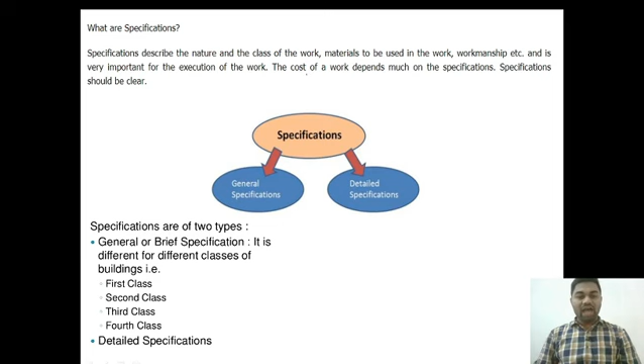General specifications also depend upon different classes of work, different classes of building. For first class of building, the specifications will be different. For second class of building, the specification is different. For third class of building, the specification is different. For fourth class of building, the specification is different. And we have detailed specification also.

So what is the purpose of giving the specification? Why, before starting a work, does the specification have to be worked out? The cost of a unit quantity of work is governed by its specification - how much quantity, if I do the work of 1 square feet or 10 square feet. Suppose I am constructing a wall, what type of brick I have to use, what is the dimension of the brick, what should be the mortar laid between the bricks - so the cost of a unit quantity of the work is governed by its specification. Based on that specification, the cost per unit can also be derived.

The second purpose: specification of the work is required to describe the quality and quantity of different materials required for a construction work, and is one of the essential contract documents. Why is it so? Because in the specification, the quality and quantity of the different materials required for the construction work are worked out. Third, this also specifies the workmanship and the method of doing the work.

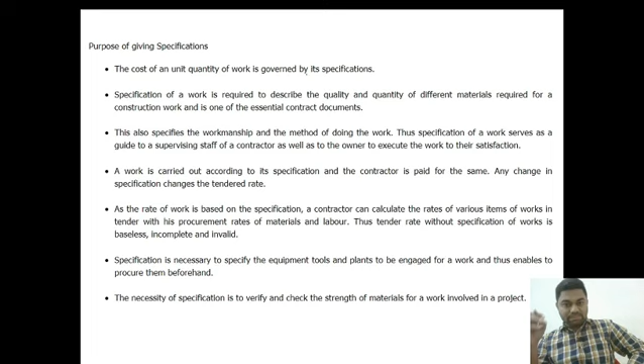Any change in specification changes the tender rate. Whatever changes occur in the specifications, there is a change in the tender rate also. As the rate of work is based on the specification, a contractor can calculate the rate of various items of work in the tender using his procurement rates of materials and labor. The tender rate without specification of work is baseless, incomplete and invalid.

Suppose I am the owner, I will be taking the detailed specification of my work from an engineer. If those details are not there in the specification, the contractor cannot bid for your project, because he doesn't know what type of material you need.

Suppose I want to construct a building, and I have not specified whether there should be marble, whether there should be a false ceiling, whether there should be putty on the walls. So how will the contractor know whether all these things have to be laid or not? How will he give the total estimate of your building?

So for accurate estimate, for accurate tender, what we need to do is work on the specification in a very detailed manner. By which, if our specifications are not clear, the tender rate without specification of the work is baseless, incomplete and invalid.

Next, specification is necessary to specify the equipment, tools and plants to be engaged for a work, and thus enables procurement beforehand. Suppose we are laying the slab - in the specification it should be clearly mentioned whether RMC has to be used or it has to be laid with the help of a mixer. If you specify this RMC or mixer point in the specification, it is easy for a contractor to procure that equipment. He will be ordering those equipments in advance, so as to procure beforehand.

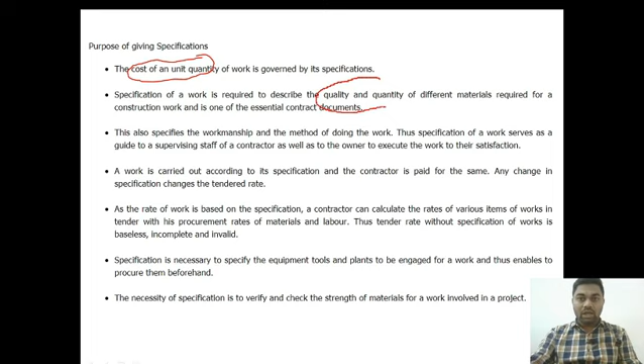Specification also describes the quality and quantity of different materials required. It also helps the supervising staff, the contractor, or the owner to execute the work to their satisfaction. It may help - let me locate the pointer.

It helps the supervising staff, contractor, as well as owner to execute the work according to their satisfaction. Work carried according to the specification, the contractor bills will be paid according to the specification on which he is working. So that is also included.

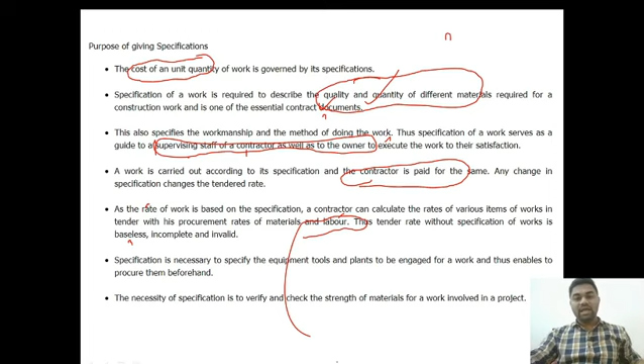Contractor payment will depend upon the specification. Based on specification, procurement of various items and rates of the materials will be done, so it will be helpful for tendering. Specification is also necessary to procure equipment, tools and plants in advance, and to check what type of materials are involved in the project.

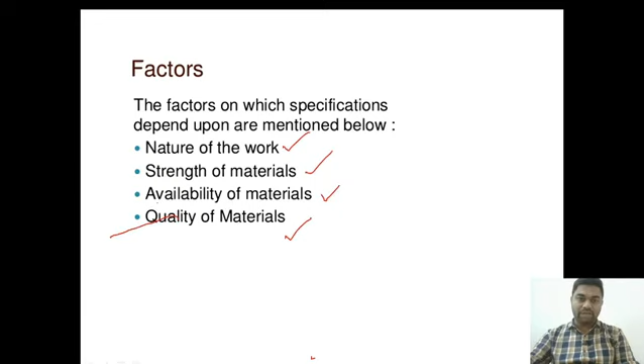The factors on which specifications depend are: first, nature of the work; next, strength of material; next, availability of material and quality of the materials. Our specifications mostly depend upon these factors. These things are mainly considered and checked to decide the nature of the work, the strength of the material, and the availability and quality of the materials. These are the factors on which specifications depend.

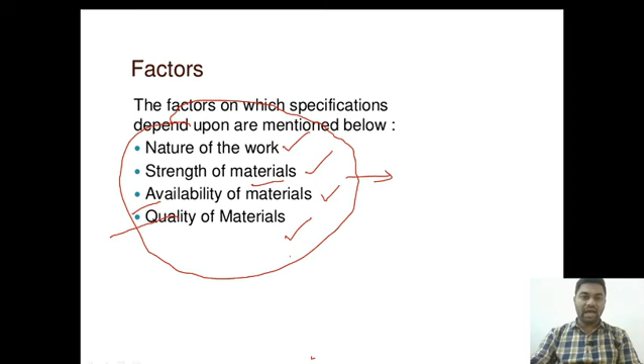As we know, specifications are of two types: general specifications and detailed specifications. First, let us see what general specification is about. Here we are looking into the general specification of first class building - what all things have to be included in it. In first class building, foundation and plinth will be laid.

DPC is known as damp proof course. DPC is of ratio 1:1.5:3 cement concrete, of 1 inch thickness, with standard waterproofing material mixed with cement and 2 coatings of bitumen, and flooring has to be done. This is generally the general specification of first class building.

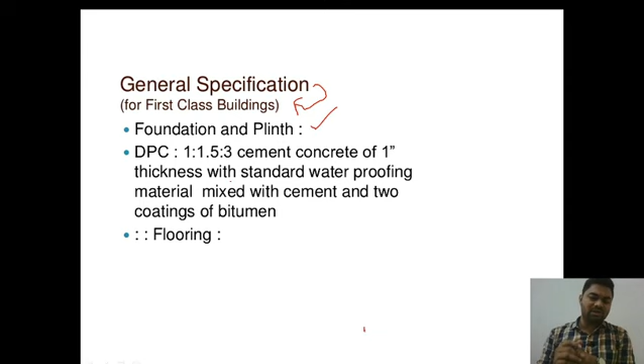What do we mean by first class building? In first class building, foundation and plinth should be there, DPC should be there. What should DPC contain? 1:1.5:3 cement concrete of 1 inch thickness, with standard waterproofing material mixed with cement and 2 coatings of bitumen. Flooring also has to be done in first class building.

Now let's look at the general specification of foundation and plinth, how it varies in first class buildings, second class building, third class building, and finally fourth class building.

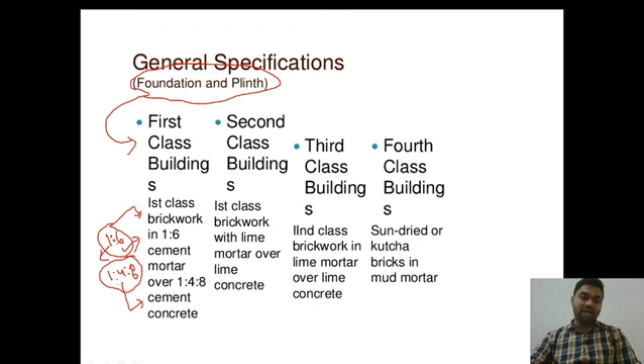In the first class building, the brickwork has to be done in 1:6 cement mortar and 1:4:8 cement concrete. The mortar used in first class building should be of ratio 1:6, and the concrete should be of ratio 1:4:8. Here 1 represents cement quantity, 6 represents sand quantity. In the concrete, 1 is cement, 4 is fine aggregate, 8 is coarse aggregate.

In the second class building, the specification is: first class brickwork with lime mortar over lime concrete. Instead of cement, we need to use lime in second class building. In the third class building: second class brickwork in lime mortar over lime concrete. Whereas in fourth class building: sun-dried or kutcha bricks in mud mortar.

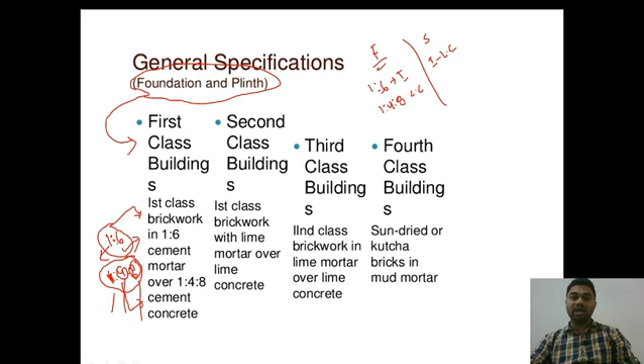So these are the general specifications for foundation and plinth in different classes of buildings. Once again: in first class building we use 1:6 cement mortar and 1:4:8 cement concrete. In second class, lime concrete is preferred - first class brickwork in lime concrete, not cement concrete. In third class building, second class brickwork is done with lime concrete, whereas in fourth class, sun-dried kutcha bricks are used with mud mortar - here neither lime nor cement is used.

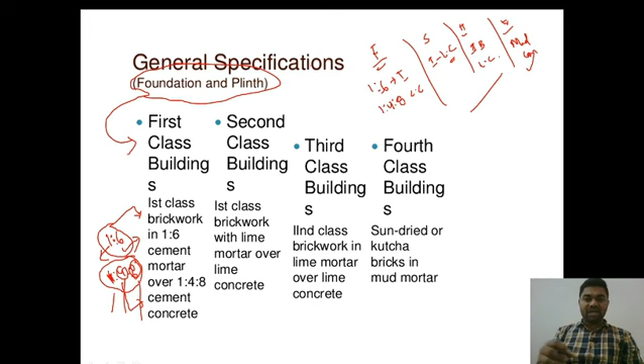So these are the things about general specification for foundation and plinth. Now let's talk about the general specification of damp proof course. In the first class building, we have to use 1:1.5:3 cement concrete of 1 inch thickness. In the first class building, what should be the cement concrete used?

The ratio 1:1.5:3 means 1 part cement, 1.5 parts fine aggregate, and 3 parts coarse aggregate. Cement concrete of 1 inch thickness with standard waterproofing material mixed with cement and bituminous material has to be used for waterproofing.

In the second class building, we use 1:2 mortar of 2 centimeter thickness with standard waterproofing material. In second class buildings, we are not using concrete, just mortar, whereas in first class buildings, for the damp proof course, we use cement concrete of ratio 1:1.5:3.

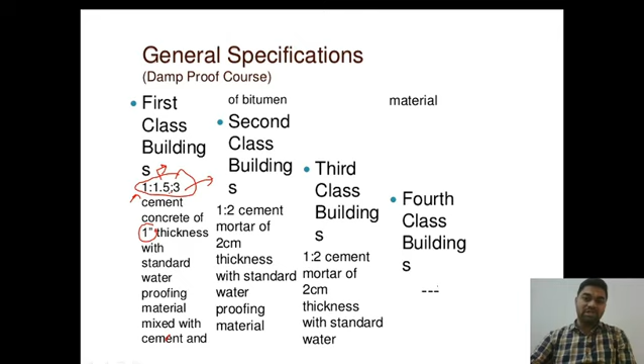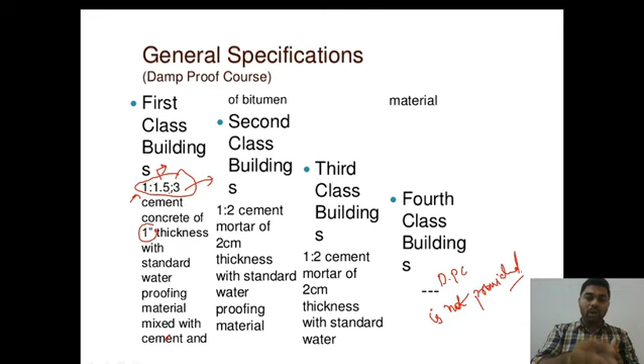So if you write the first class building specification for damp proof course: 1:1.5:3 cement concrete has to be provided with 1 inch thickness with waterproofing material. This is the full specification for first class buildings. But when constructing a fourth class building, the contractor does not lay a damp proof course at all.

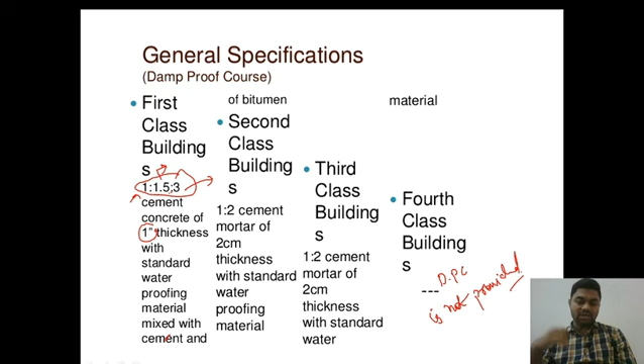Now let us see the general specifications for superstructure. For the first class building: first class brickwork with 1:6 cement mortar, and lintels over doors and windows shall be of RCC. So when constructing a superstructure for a first class building, it should follow this specification.

This means the brickwork the contractor has to do should be of 1:6 cement mortar, and RCC lintels should be provided over doors and windows.

Whereas in the second class building, brickwork should be done in lime mortar, and the lintel over doors and windows shall be of reinforced brick. Instead of concrete, we lay reinforced brick over the lintels.

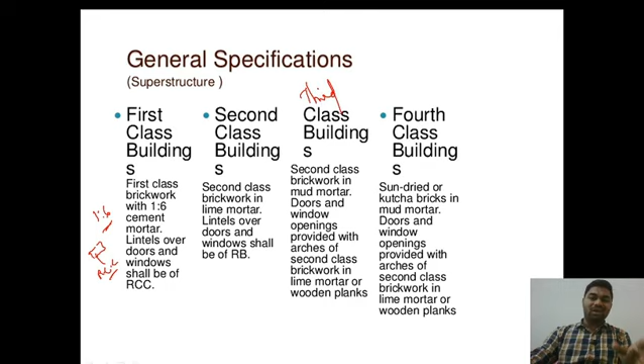Next, in the third class building, second class brickwork in mud mortar has to be done. Doors and window openings are provided with arches of second class brickwork in lime mortar, or wooden planks.

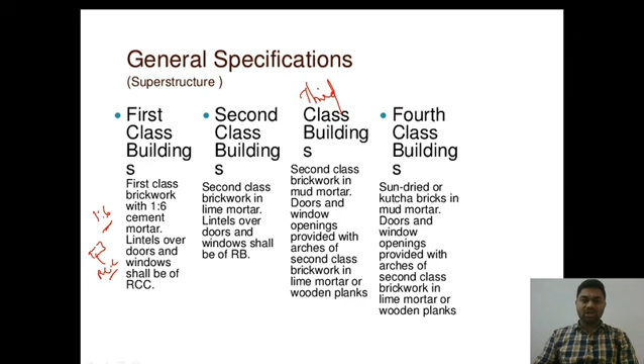Now let us see the general specifications for roofing. In the first class building, the height of the room shall not be less than 12 feet over an RCC slab, and an insulation layer should be provided.

In the second class building, a reinforced brick slab with 7.5 centimeter lime concrete terracing over a flat terraced roof over wooden beams has to be provided, or a jack arched roof. In the third class building, mud over brick, or planks over wooden beams, or a GI sheet sloping roof has to be provided.

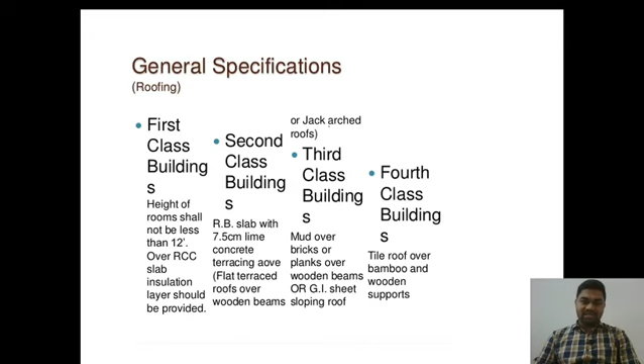In the fourth class building, a tile roof over bamboo and wooden supports needs to be done. This covers the general specifications regarding roofing.

Now for flooring: the general specification for the first class building is 2.5 centimeter cement concrete over 7.5 centimeter lime concrete. First, 7.5 centimeter of lime concrete is laid, then above that 2.5 centimeter cement concrete is done for flooring.

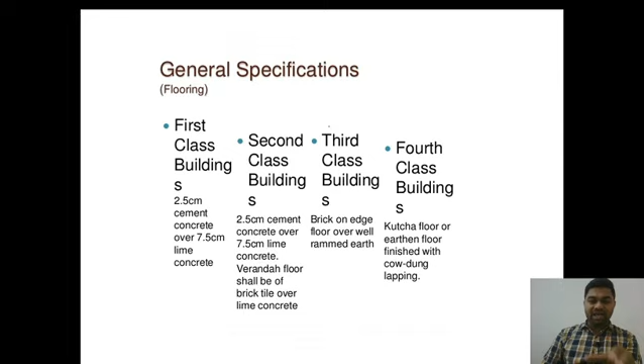For the second class building, it's 2.5 centimeter cement concrete over 7.5 centimeter lime concrete, and the veranda floor shall be of brick tile over the lime concrete. This covers all the flooring specification for the second class building.

In the second class building, the veranda flooring has to be done separately with brick tile over lime concrete. In the third class building, brick on edge flooring is done over well-rammed earth. Whatever earth surface is there, after compacting, brick on edge flooring has to be done.

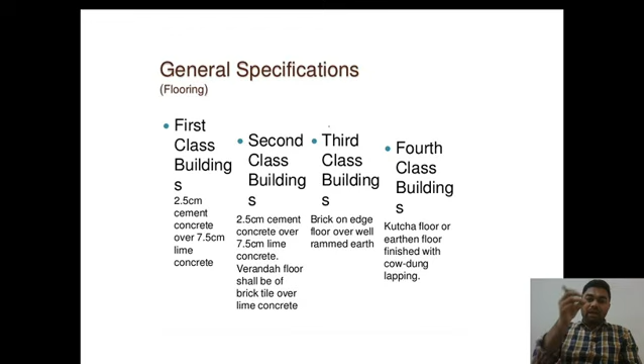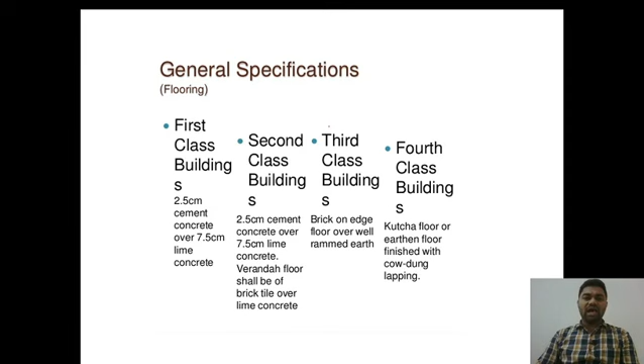For the fourth class building, kutcha floor or earthen floor is finished with cow dung lapping. Finishing is done with earthen floor or cow dung for 4th class building. These are the general specifications for flooring.

General specification for finishing: for the first class building, inside and outside shall be 12 mm cement lime plastered. For the first class building, plastering has to be done with 12 mm cement lime, or 1:1:6 cement lime plaster.

Inside and outside, whitewash with interior distemper. We need to place interior distemper inside and outer whitewash, with plastering both inside and outside using cement lime plaster of 1:1:6 for first class building.

For the second class building, inside and outside shall be 12 mm cement mortar plaster 1:6. Ceiling shall be cement plaster 1:3 inside and outside. This is for second class building.

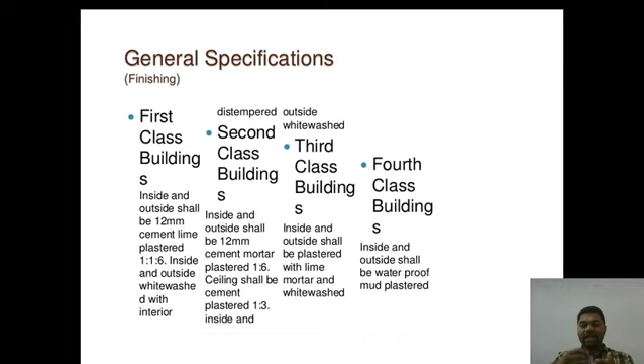For the fourth class building, inside and outside shall be waterproof mud plastering. We need to do mud plastering from the outer wall, from the outer side.

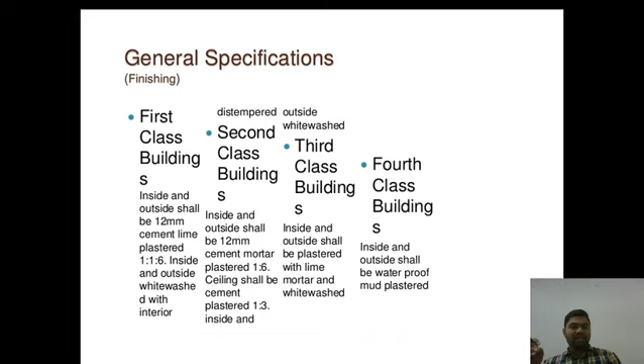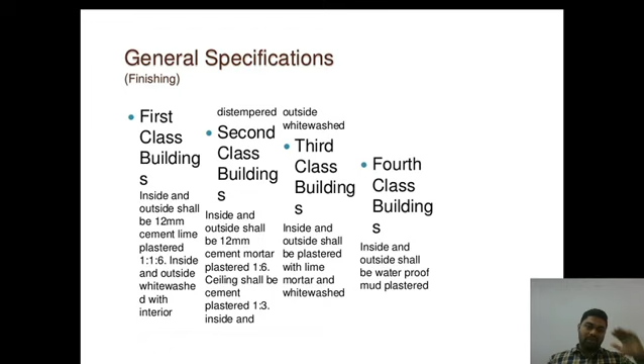This is all about the general specification of finishing for first class, second class, third class and fourth class buildings. In the fourth class building, poor construction quality will be maintained inside and out. The greatest superior quality is first class, then second class, then third class quality, and very poor quality is maintained in fourth class building.

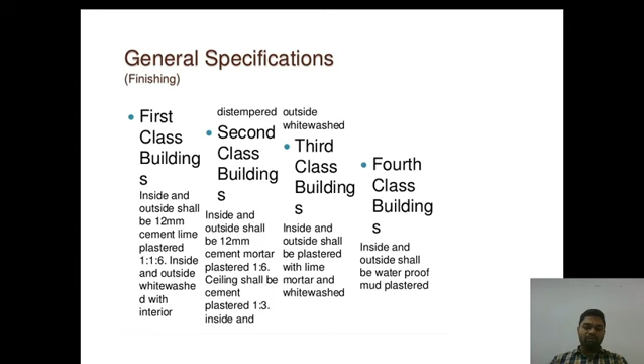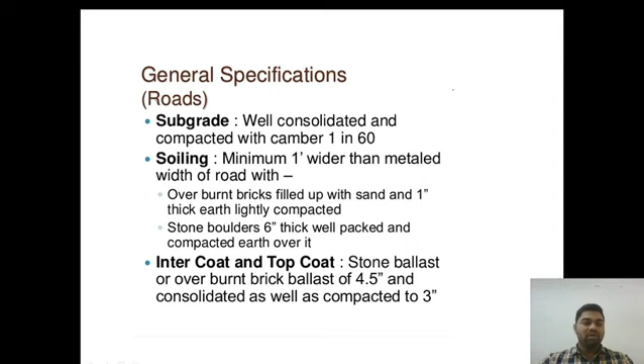When we look at general specification for roads: subgrade should be well consolidated and compacted with a camber of 1:60. What is the meaning of camber?

In roads we make camber of 1:60. Here the road surface will be raised in the center portion. That is known as camber, and it has to be done at 1:60.

Soiling below should be minimum 1 foot wider than the metaled width of the road, with overburnt bricks filled up with sand and 1 inch thick earth lightly compacted. Stone boulders 6 inch thick will be packed and compacted earth placed over it. This is about the soiling.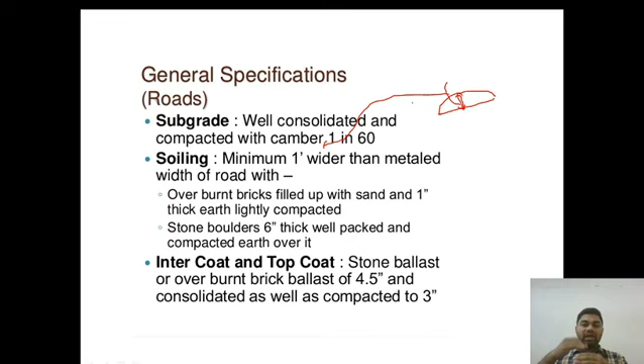Intercoat and top coat: stone ballast or overburnt brick ballast of 4.5 inch, consolidated and compacted to 3 inch. So intercoat and top coat will be made of stone ballast.

Bitumen first coat: stone grit of 20 mm gauge and 220 kg asphalt or tar number 3, and 1.5 cubic stone grit per 100 square meter. This is the specification for bitumen first coat.

For bitumen second coat: stone grit of 12 mm gauge at 120 kg asphalt and 0.7 cubic stone grit per 100 square meter. Brick edging: overburnt brick placed on both sides.

Miscellaneous: for heavy traffic, the wearing surface may be provided with cement concrete. If the flow of traffic is very heavy, we need to provide a cement concrete wearing surface. If the subgrade is soft or weak, a well compacted thick subbase of inferior material is to be used.

If the subgrade is soft, below it we need a subbase of inferior material. The inferior material has to be compacted well and used so that there are no settlements in the roads.